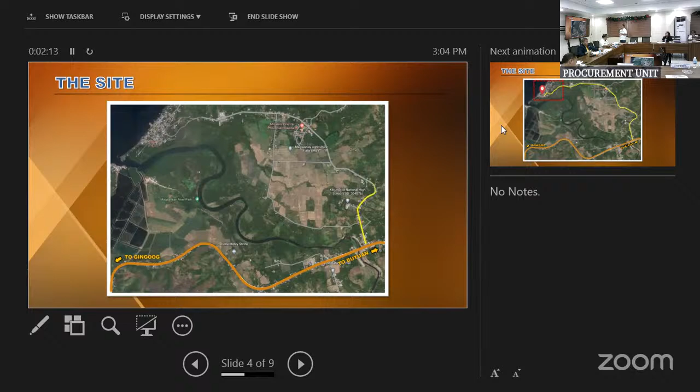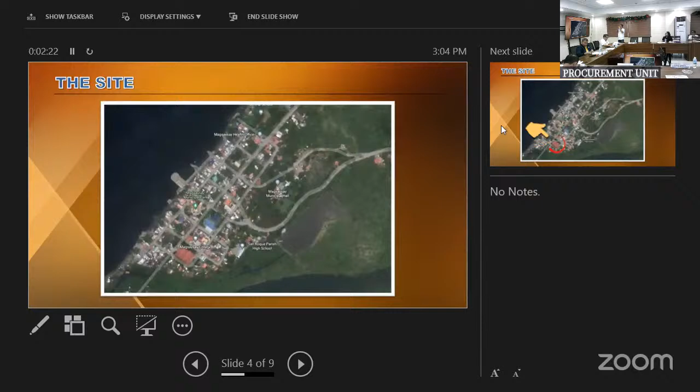So this is our site from the main highway going to Butuan. We have an access road leading to the site. Let's have a closer look. The site is just across Magsaysay College, and as I mentioned earlier, the site is near the sea.

Here are current pictures of the site. This is phase 1, ongoing, so it's still far from completion for that phase.

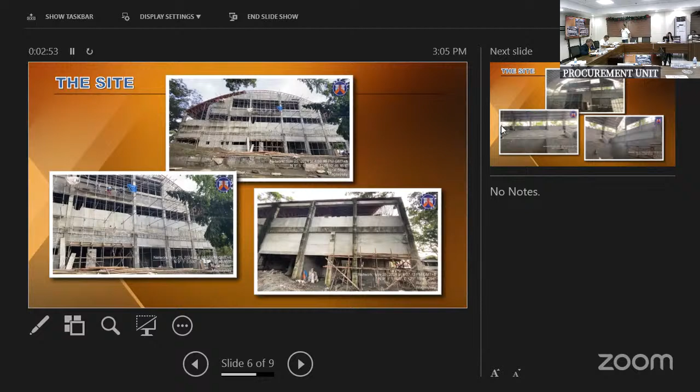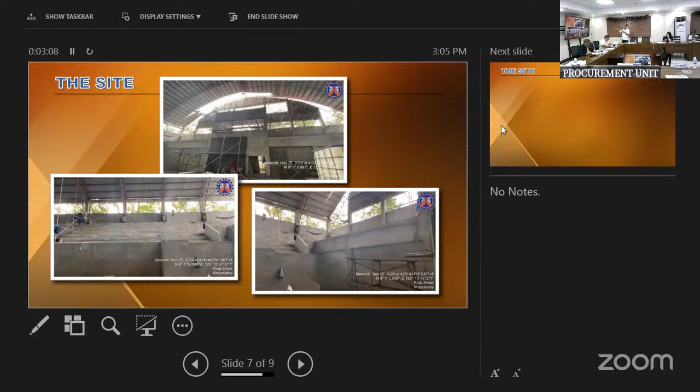We have additional pictures of the interiors. These are the pictures, and the top picture is the VIP room.

Additional pictures, a closer look at the reinforcement process. This is in preparation for the catwalk to be built for the second phase, since the existing structure lacks sufficient strength, as this is an existing structure. So we added additional walls, partitions, and everything to complete the gym, which required reinforcement.

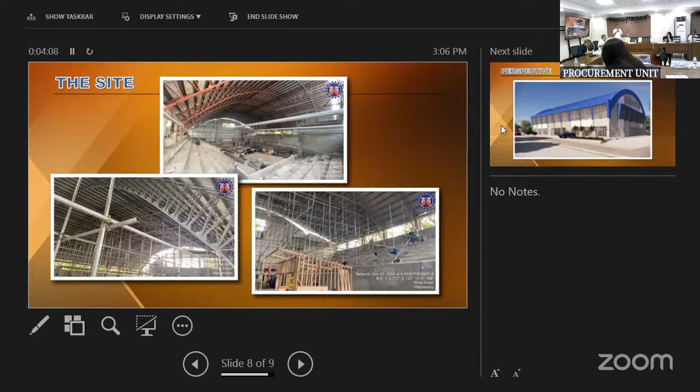This is the original truss, and we had it reinforced by adding steel plates to all members of the truss to strengthen it, as mentioned, because we are going to provide a catwalk for our second and final phase.

So this is how the gym would look like after it's finished. We provided sunbreakers, and it also has awning windows and cladding, and around the gym will be rentable spaces and office spaces in front.

So for the first phase, the ongoing phase of the project, all stalls and rentable spaces will be completed. For the second and final phase in 2025, hopefully it will be finished and the gym will be usable. To give us the BOQ and everything, I'll pass it back to our program engineer, Jose Hayoma.

Thank you, architect. This is still the same project, 25KK0023, with the ABC of 29,700,000 pesos, 270 calendar days.

As mentioned by Architect Frank, we have overhead catwalk for electrical and maintenance, which will be added for the phase 2 project.

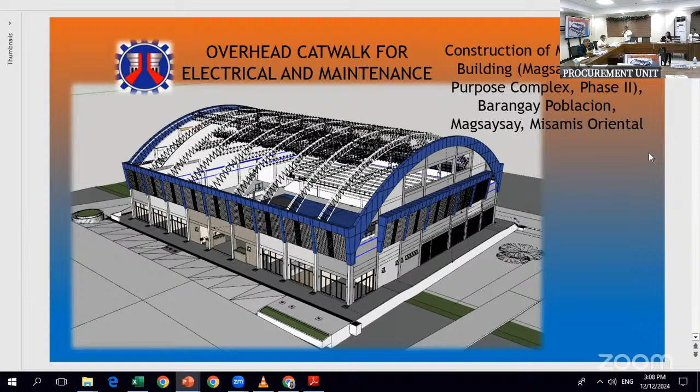Embankment and roadway structure excavation common soil, 58.93 cubic meters. Gravel fill, 213.48 cubic meters. Structural concrete 3000 psi 28 days, 257.9 cubic meters. Reinforcing steel deformed grade 40, 5,227.41 kilograms.

179.2 square meters. Soil poisoning, 508 liters. CHB non-load bearing, 151.95 square meters. Doors, wood panel, 11.34 square meters. Steel louver door.

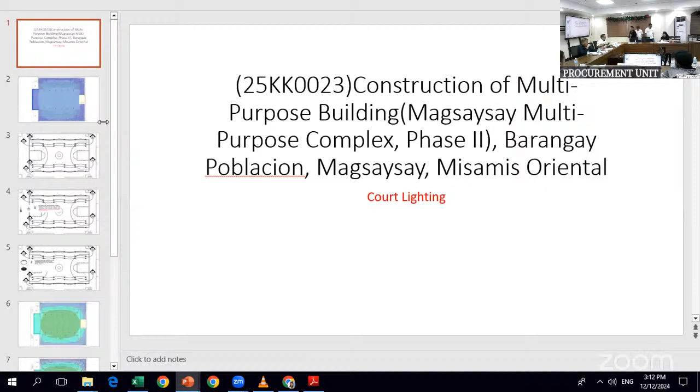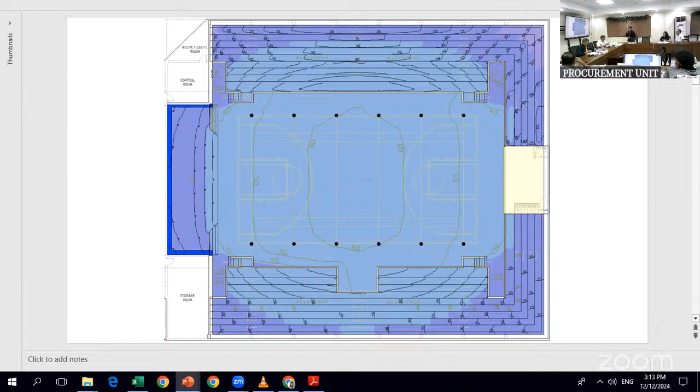So next slide, please. This will be the layout, the number one. The lamp labeled as number one is a LED high power lamp, 80 watts daylight, 6500K color temperature, and 9,600 lumens.

Next slide, please. So the next lamp type is a LED high bay smart bright generation 4. It is neutral white, 200 watts, 120 lumens per watt, and 24,000 lumens per light.

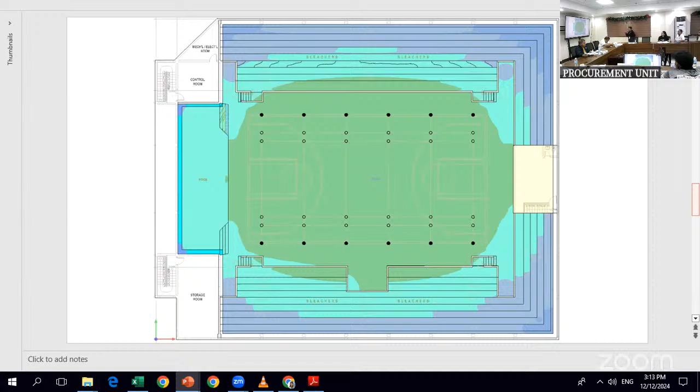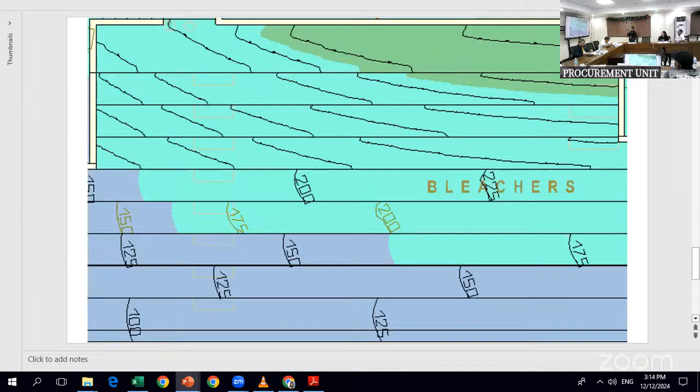Next slide. So this is the image on the bleacher part. Next slide.

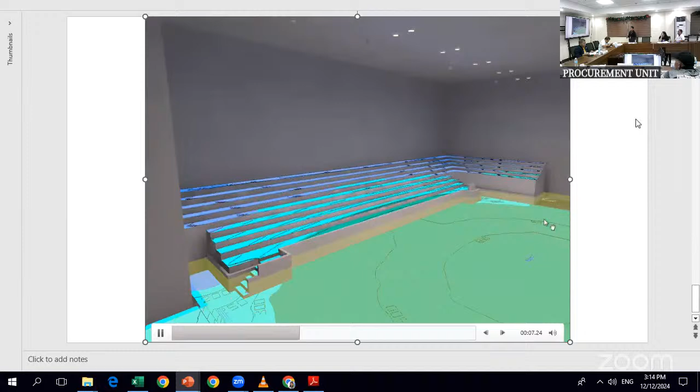So that is all for the presentation of illumination.

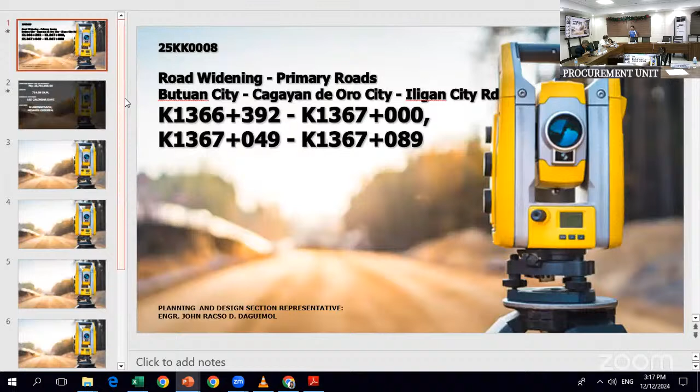I'm Engineer John Racso D. Daguimol from Planning Design Section. So for that project.

So it's segmented. The area is Magsaysay, Misamis Oriental, segment 1 and segment 2, with the appropriation of 50 million net, FY 2025.

Scope of works is installation of solar street lights, construction of road center island, installation of road markers. So with calendar days of 200.

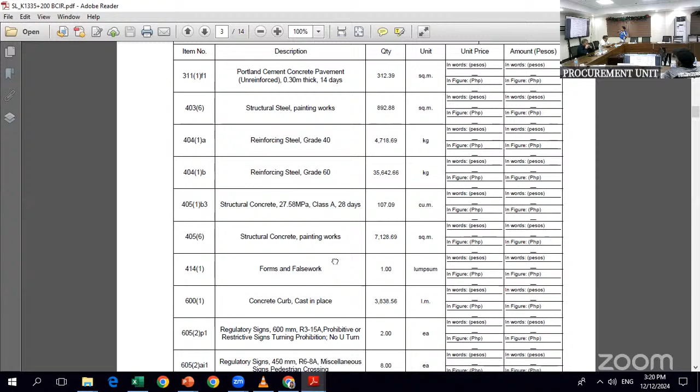For the barrier, this is item 405 1B3 structural concrete with 27.58 megapascal. Dahil nabod siya structural concrete, painting works 405.6 with forms and falsework 414.1. Nabod siya concrete curb cast in place, item 600.1.

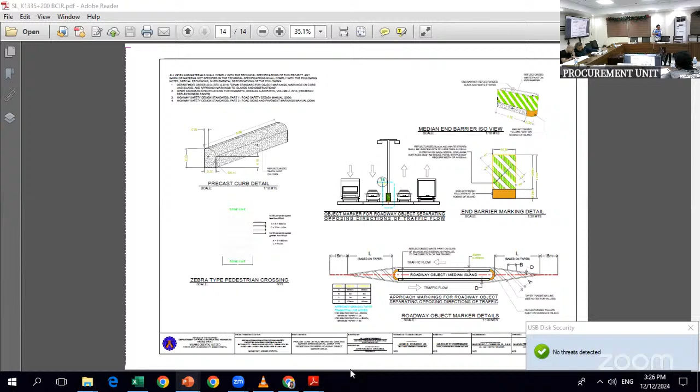So I will be discussing some important points to remember or to note for the installation of solar street lights on this project.

First of all, this street lighting design is bounded with the DPWH DO number 26 series of 2023, the revised DPWH standard specification for item 624 roadway lighting, and the DPWH DO 19 series of 2023, which is the guidelines and standard design drawings for solar powered roadway lighting along national roads, and the Department of Energy roadway lighting guidelines.

So for the DOE road lighting guidelines, it is stated in section 2, scope and applicability, that this part is considered as a major road. These are roads which are part of a roadway system that serves as the principal network for through traffic flows. The route connects areas of principal traffic generation from different cities or municipalities.

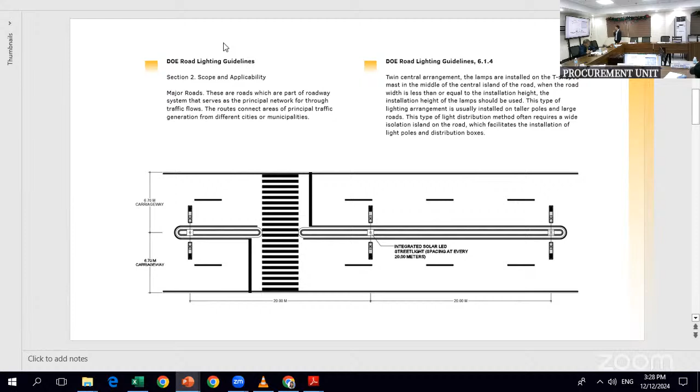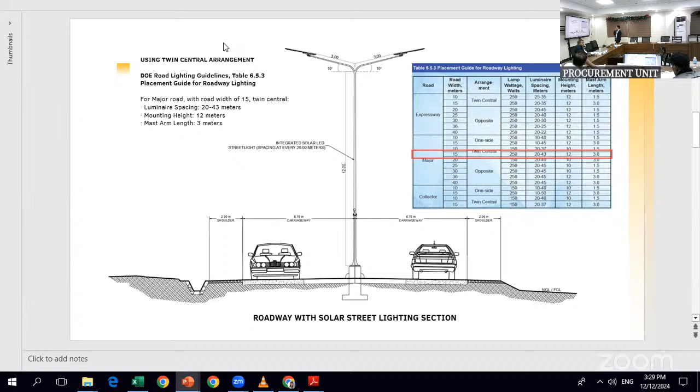So using the twin central arrangement from the DOE road lighting guidelines table 6.5.3, the placement guide for roadway lighting, for major roads with road width of 15 meters, for twin central the luminaire spacing will be 20 to 43 meters. For this project, we will be applying the 20 meters spacing. For the mounting height, 12 meters, and the mast arm length, 3 meters.

So as stated in the DPWH standard specification for item 624 roadway lighting, 624.2.3.2, for solar LED street light requirements, the color temperature of white LEDs used in the system shall be in the range of 5,500 Kelvin to 6,500 Kelvin.

So it will be specified on the technical parameters of the lamp. Number two, the lamps shall be housed in an assembly suitable for outdoor use and shall be rated as IP65. The LED housing shall be made of pressure die-cast aluminum having sufficient area for heat dissipation and shall be heat resistant. So from the LED luminaire details, these are the necessary components of the lamp.

So for the details of the mast arm and lamp inclination, as you can see, both arms - this is a double arm pole - both arms measure 3 meters in length and with an angle of 10 degrees.

Stated in the 6.5.1 DOE roadway lighting guidelines, the lighting criteria used are the maintained average road surface luminance, the overall and longitudinal uniformity of the luminance, the surround ratio, and the threshold increment. So these are the values to be determined in designing the illumination.

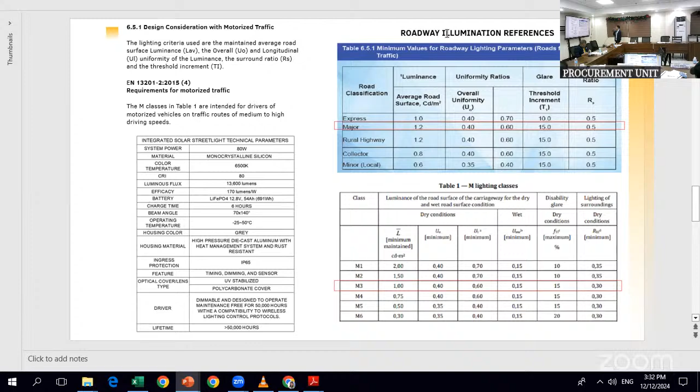Luminous flux will be 13,600 lumens, with efficacy of 170 lumens per watt. Battery will be LiFePO4, 12.8 volts, 54 ampere hour. And the beam angle will be 70 by 140 degrees, and so on. So these technical parameters are reflected on the plan.

So next, please. These are the results of the illumination simulation. As you can see, all the calculated data or values have passed the target values. So the specified lamps have met the parameters. Next, please.

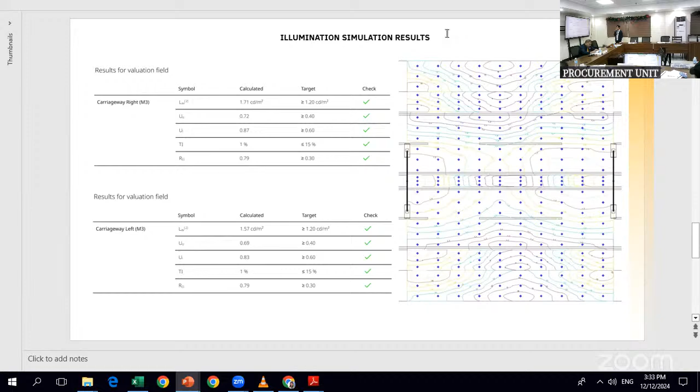So these illustrations are based on the results of the illumination simulation using the DIALux software. The luminaire specification indicated in the plan has passed the lighting criteria according to DOE minimum values for roadway lighting parameters and EN 13201-2 of 2015. Next, please. I think that's all.

I just want to emphasize to the contractors that we will be requesting an actual evaluation and testing of the lamp, because we're very particular with the lumens output of the lamp, its battery, and the material of the panels. That's all, thank you.

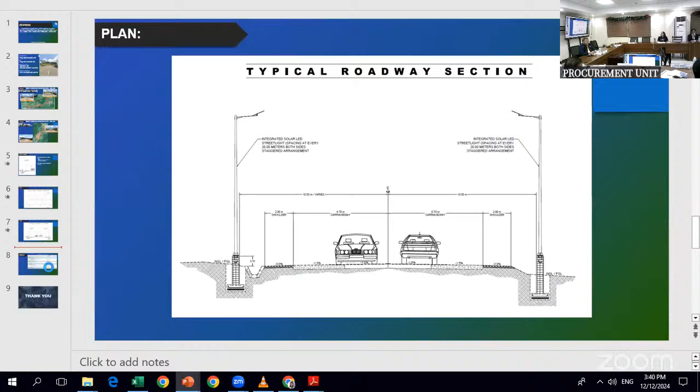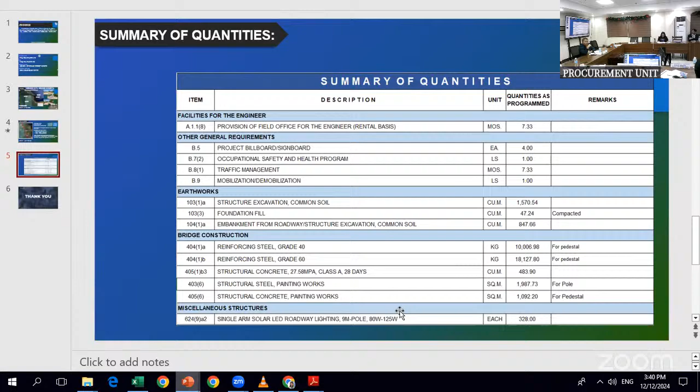Okay, thank you for the presentation, Engineer Jan Raxo. Thank you. Okay, Engineer Kit.

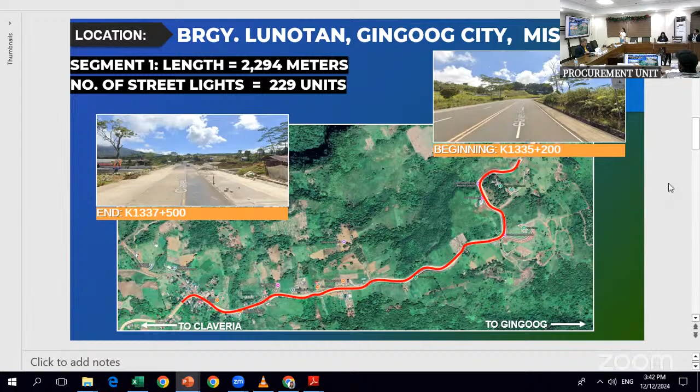Next, our scope of work is installation of solar LED street lights, 100 watts, 9 meters mounting high pole with 1.5 meter single mast arm. This will be further discussed by Engineer Kit for the electrical works, and reflectorized traffic paint for the pedestal.

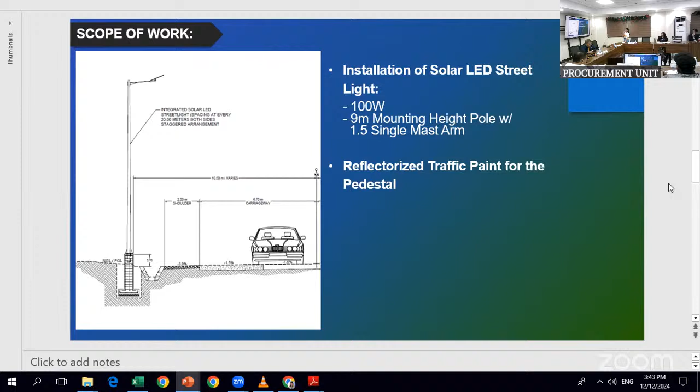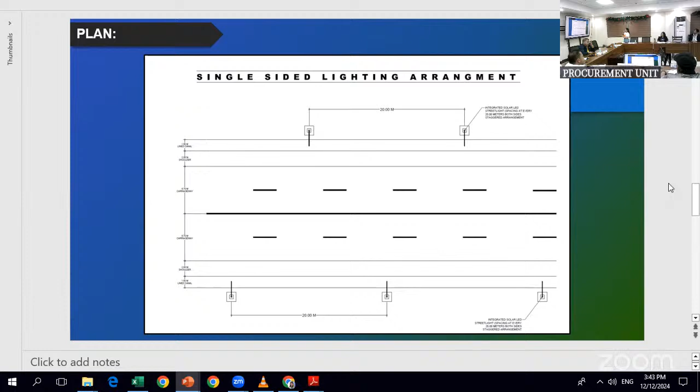So this is the straight line, single-sided lighting arrangement, with 20 meters gap per pole. Next.

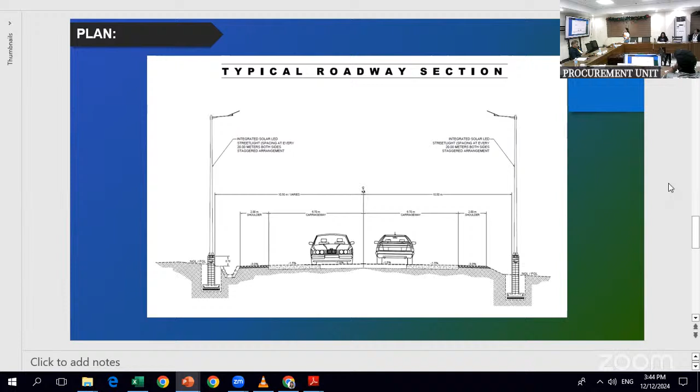It is staggered. Our typical roadway section has 6.7 meters per lane with shoulder. Our street lights are 9 meters in height with 1.5 meter mast arm, at 0.7 meters from the natural grade line to the pedestal. Next.

Good afternoon, everyone. I will further discuss the installation of solar street lights for this project. I just want to clarify what Sarah said earlier. Instead of a single-sided arrangement, it will be a double-sided arrangement but staggered. From the same references, it is considered as a major road, and as stated in the DOE road lighting guideline 6.1.2, staggered arrangement in which the luminaires are placed alternately on each side of the road.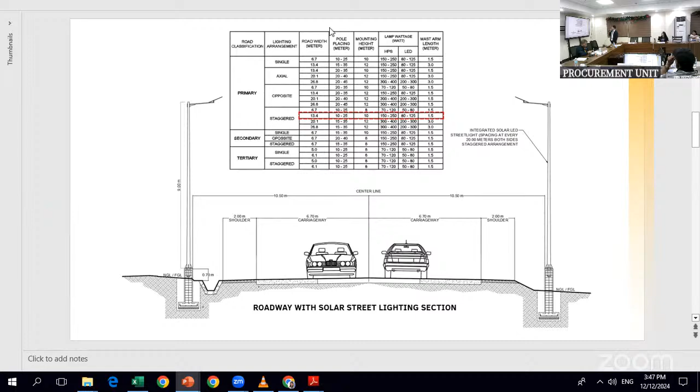Next, please. This will be the illustration of the roadway with solar street lighting section. This table is based on the Bureau of Design for these solar street lighting designs and drawings. The integrated solar street lights will be spaced 20 meters on both sides, and the pole height will be 9 meters. Next, please.

From the DPWH standard specification for item 624, roadway lighting 624.2.3.2, the solar LED street lights requirements state the color temperature shall be 5,500 Kelvin to 6,500 Kelvin, and the lamp shall be housed in an assembly suitable for outdoor use and rated as IP65. These are the necessary components of the luminaire. For the details of the mast arm and lamp inclination, the mast arm will have a length of 1.5 meters, inclined to 5 degrees, and the lamp will be inclined to 15 degrees.

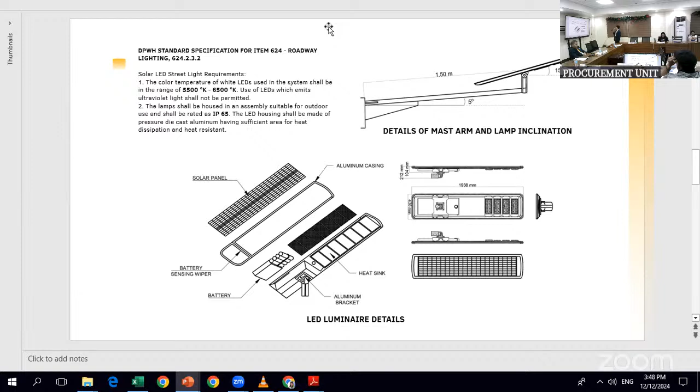So for the design consideration of motorized traffic, same criteria as discussed earlier. From the references, we came up with these technical parameters: the system power shall be 100 watts, the PV material should be monocrystalline silicon, the color temperature of the light should be 6,500 Kelvin, CRI will be 80, luminous flux will have 17,000 lumens, efficacy of 170 lumens per watt, and the battery should be 25.6 volts, 30 ampere hour, and so on.

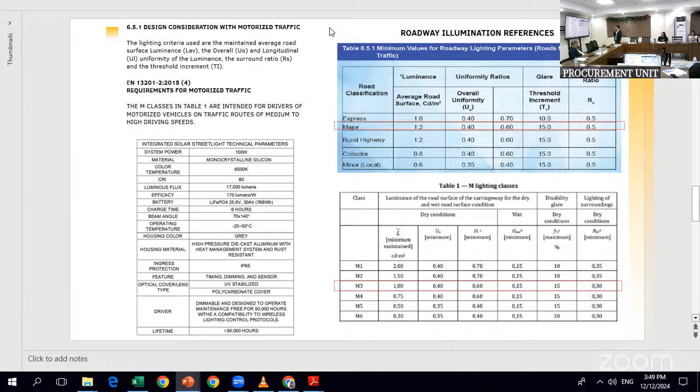I just want to add, for the contractors, we will be requiring you to submit or present an actual product for the evaluation and testing of the luminaires, because we are very particular with the lumens output and the battery and the material of the PV solar panel. That's all, thank you.

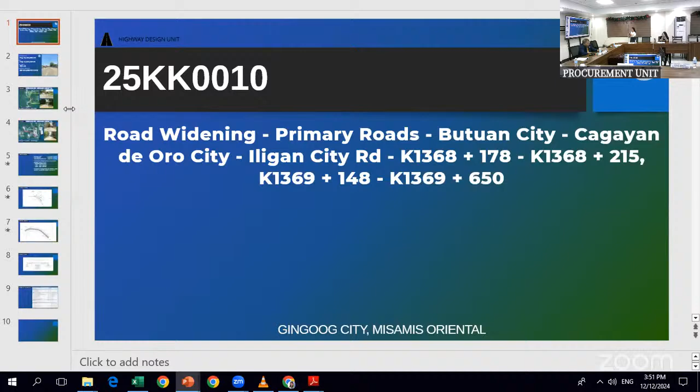For our next project, we have 25KK0010, road widening, primary roads, Butuan City, Cagayan de Oro City, Iligan City Road, from K1368 plus 178 to K1368 plus 215, and K1369 plus 148 to K1369 plus 650.

Our project appropriation is 34,100,000. ABC is 33,418,000. Net length is 563 linear meters. Contract duration is 185 calendar days. Our project location is at Binuangan, Misamis Oriental.

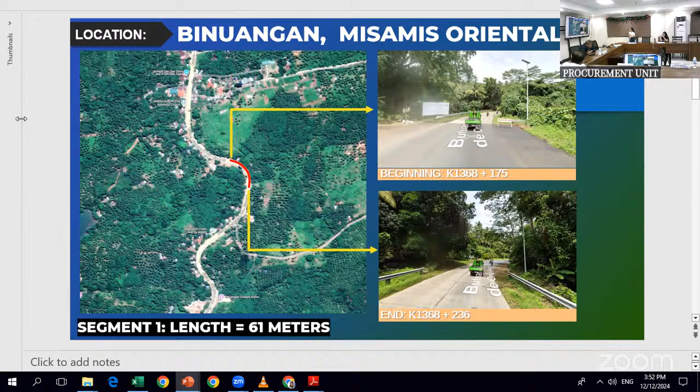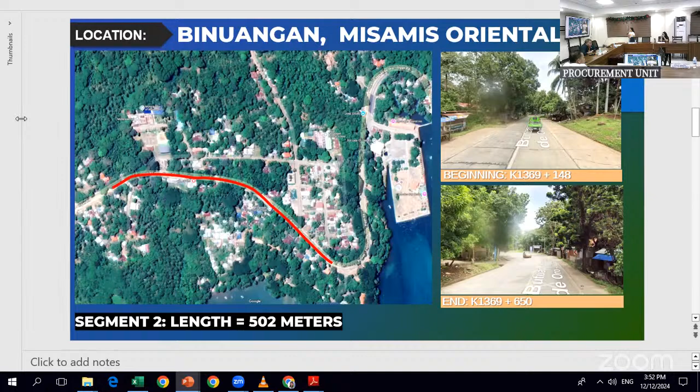Next, our segment 2: we have 502 meters from beginning station 1369 plus 148 to end station 1369 plus 650.

So our scope of work: we have widening of road with 3.35 meters width with 0.3 meters thickness PCCP. We have paved shoulder, 2 meters width with 0.23 meters thickness. We have concreting of junction road, 5 meters width with 0.23 meters thickness. We have construction of retaining wall with wheel guard with paint.

Installation, extension of culvert: we have 910 mm and 760 mm diameter RCPC. We have extension of RCBC, 1 barrel, 7 meters by 5.8 meters RCBC, 1 meter by 1.9 RCBC, 1.9 by 2 meters RCBC. We also have removal of trees, existing structures and obstruction, existing lined canal, slope protection, removal of guardrails, and removal of existing PCCP and slabs.

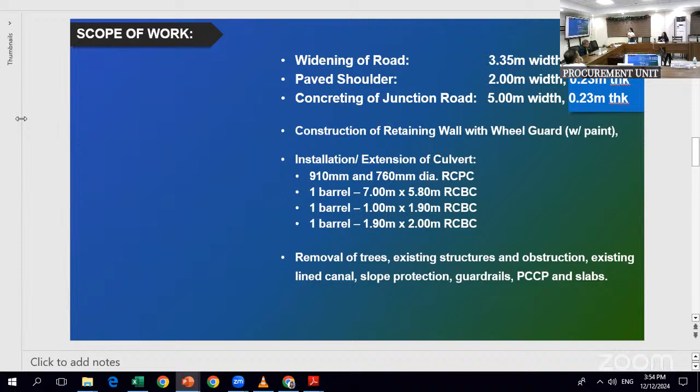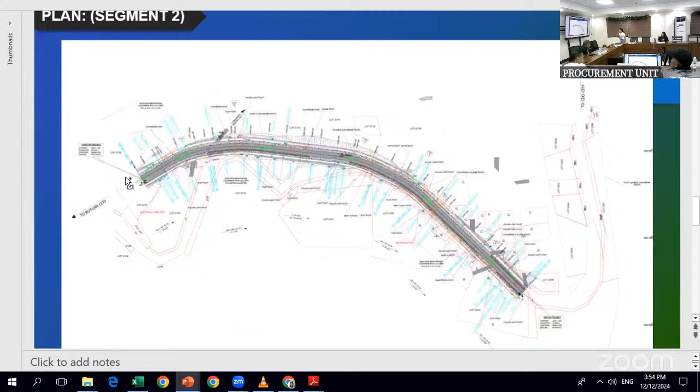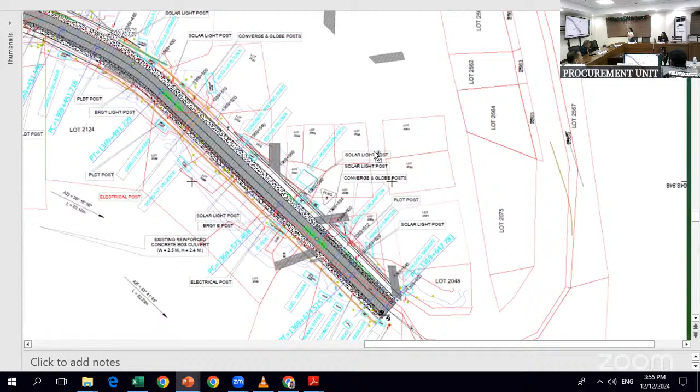Next, our plan for segment 2, beginning at 1369 plus 148 to 1369 plus 650. So in this segment, we have junctions that need to be removed and replaced due to widening, and also RCPC extension of earth covers and box culverts.

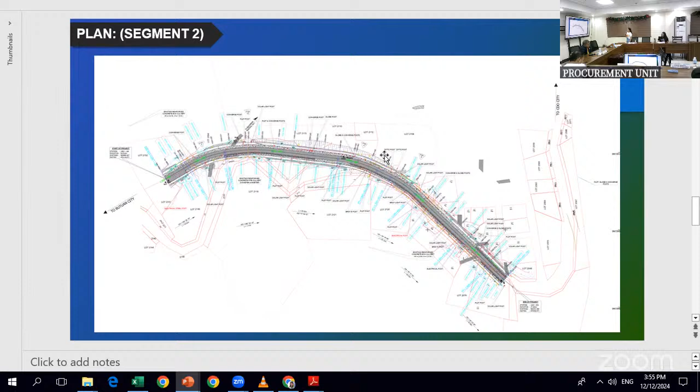This is our typical roadway section. So we have 3.35 meters widening, 2 meter shoulders, and construction of retaining wall.

These are the items included in the project. We have provision of field office for the engineer, project billboard and signboard, occupational safety and health program. We have traffic management, mobilization and demobilization. We also have removal and relocation of utilities, this is for the removal and relocation of our electrical posts.

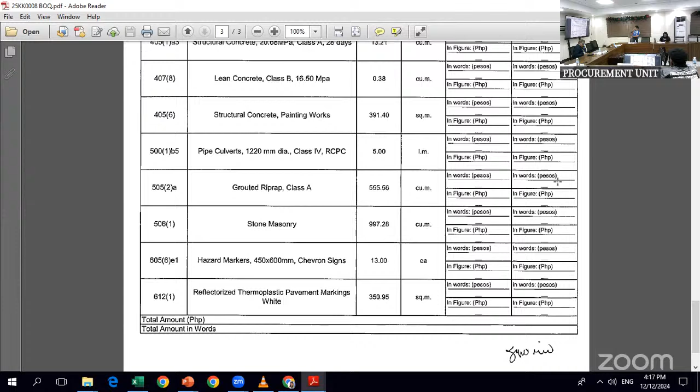Okay, so thank you, Engineer John Raxo, for the presentation. From the new online viewers, none - no queries or clarification.

So we will proceed for the checklist of technical and financial documents and other requirements for infrastructure projects. Submission and response of bids for technical components and work. Class A, legal documents: a valid PhilGEPS registration certificate with platinum membership, all in accordance with section 8.5.2 of the IRR. PhilGEPS certificate of registration and membership.

All bidders shall upload and maintain in PhilGEPS a current and updated file of the following Class A eligibility documents under sections 23.1A and 24.1A: 1. Registration certificate, 2. Mayor's business permit or its equivalent document, 3. Tax clearance, 4. PCAB license and registration, and 5. Audited financial statements or AFS.

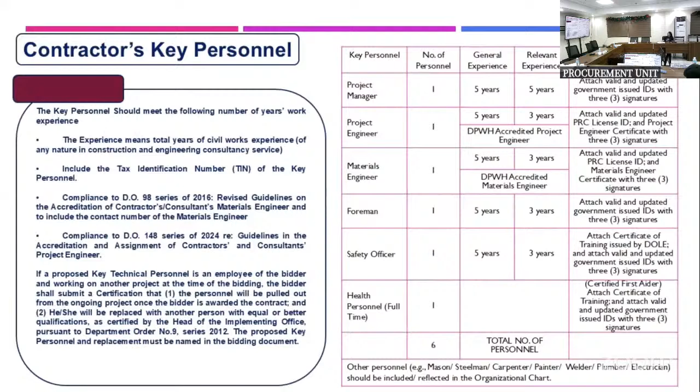Other personnel such as the mason, steelman, carpenter, painter, welder, plumber, or electrician should be included or reflected in the organizational chart. Contractors' major equipment needs.

A contractor is required to provide proofs of ownership and other supporting documents for equipment owned, lease agreements for equipment lease, and or under purchase agreements, supported by certificate of availability of equipment from the equipment lessor or vendor for the duration of the projects.

Proofs of ownership and other supporting documents for equipment pledge must specify and indicate the model or year, capacity, performance, or size, plate number, motor number, or body number, chassis serial number, engine serial number, specific location and condition per department order 58 series.

Contractors' minimum materials testing equipment. Please refer to DO number 11, series of 2017 for the minimum material testing equipment. DPWH Procurement Manual Volume 2 Infrastructure Main Guidelines specifically requires the submission of the materials testing equipment as stated in Clause 5.6 and 2.8 Technical Proposal and Clause 5.6 and 2.8.4.c Project Requirements using Form DPWH INFR 15.

List of contractors, major construction, and laboratory equipment units to be assigned to the contract, supported by certifications of availability. Original duly signed omnibus sworn statement, or OSS, and if applicable, original notarized secretary certificate in case of corporation, partnership, or cooperative, or original special power of attorney of all members of the joint venture, giving full power and authority to its officer to sign the OSS and do acts to represent the bidder.

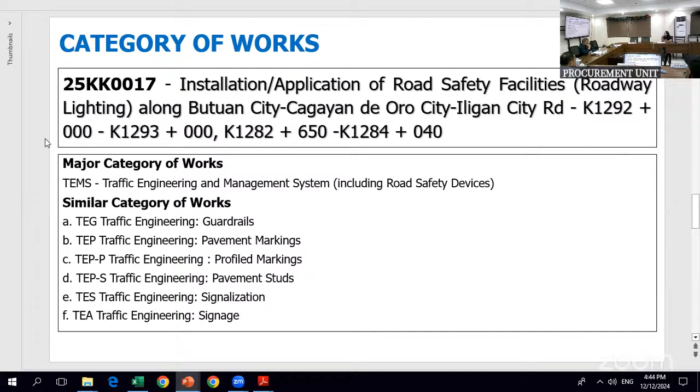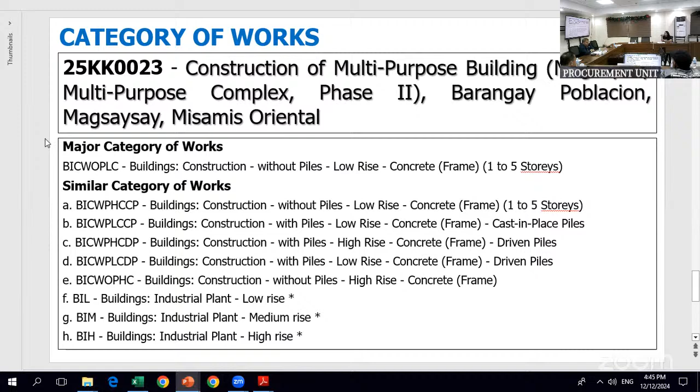Same for 25KK0018, the required category of works is TEMS. And for 25KK0023, the required category effect is BICWOPLC, or buildings construction without piles, low rise, concrete from 1 to 5 stories. This is a sample of the technical and financial documents to be submitted.

Note that the bid and supporting documents should be sealed and properly bound. That's all, Mr. Chair. Thank you.